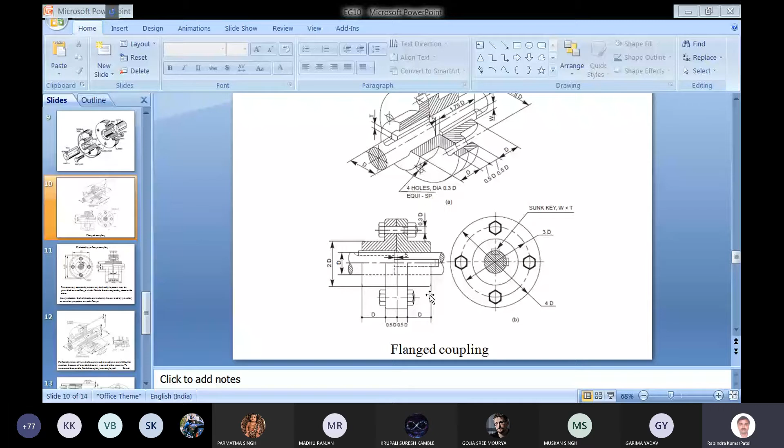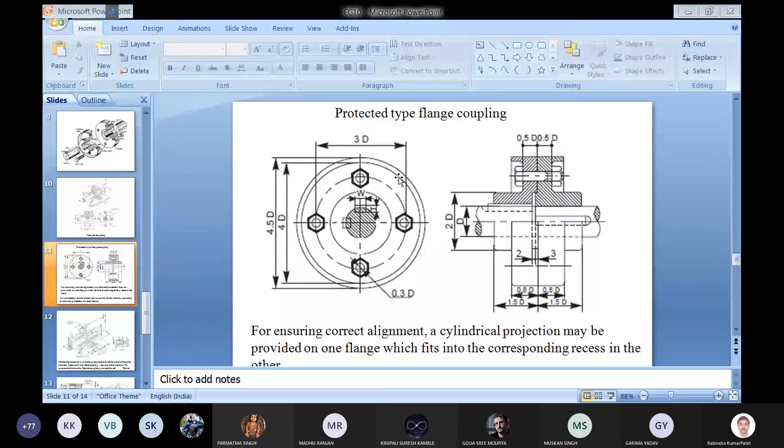Now we can see the same coupling which we have explained, the protected type flange coupling, where the upper half in section of that same coupling has been shown. Only protection has been made, and the rest of the things are the same for this coupling also. Here the side view has been shown. Side view is also the same, only one extra circle will be coming here, the second largest circle. So that is corresponding to the protection. Projection.

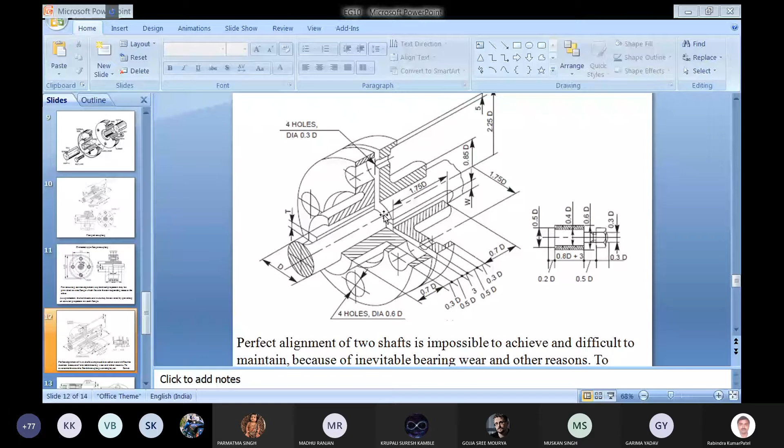So there's no difference in this. Only difference is that here no projection has been given, and at the same time here a hole with bigger size is there, of such size which can accommodate these washers. Leather washers are there, so if a little bit of misalignment is there in the shaft, they will be compressed in one or other way. So that's why this type of bolt has been used in this case.

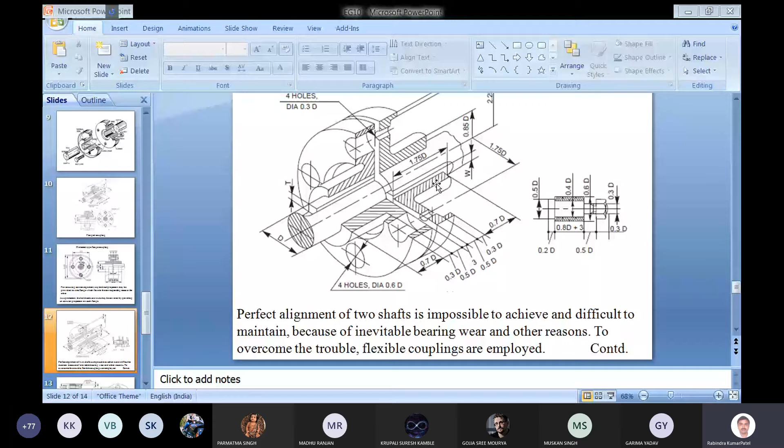So here in the section you can see the front view upper half in section has been shown. Washers are shown here, 3 washers, and different directions for hatching have been shown for each washer, because the different washers may have different materials. Even if they have the same material, we can show the hatching in different directions, because they are different parts. And the side view you can see like this, which is the left side view.

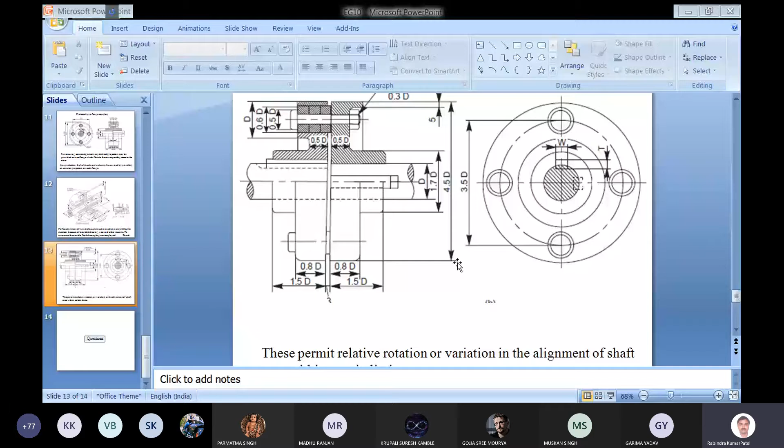So with this, this lecture is over. If you have any problem related to any part like cotter joint, knuckle joint, and coupling, you can ask.

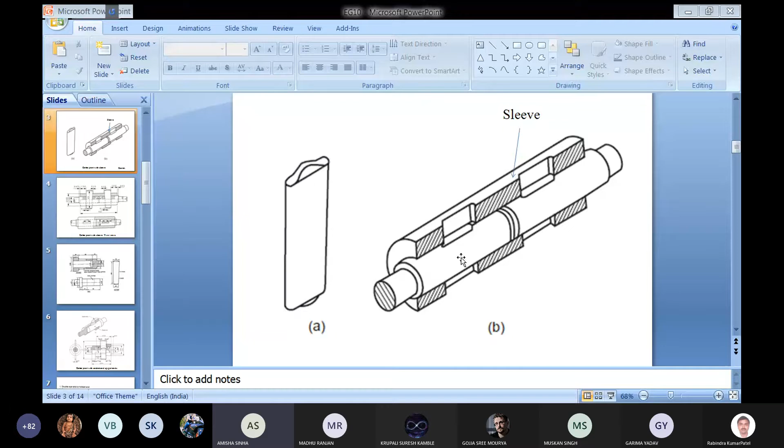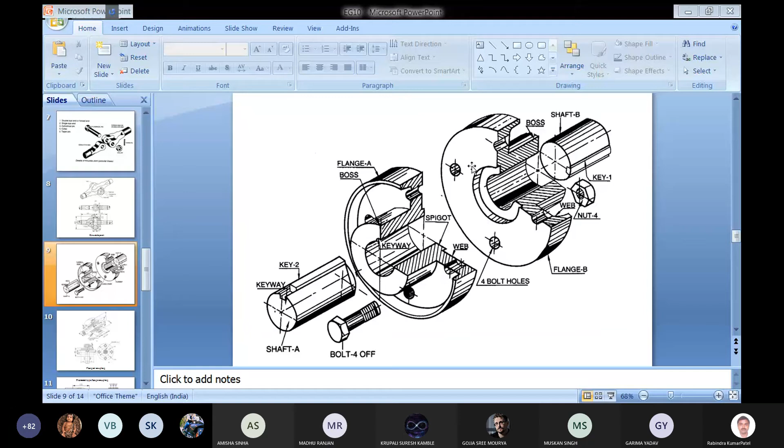Could you explain this protected flange coupling again? Okay. So in the protected type flange coupling, we have two flanges like this. In one flange, a protection or projection has been made. Similarly, we have a projection on the other side of this flange. Apart from the projection, we have a boss or hub here. This is the boss or hub.

In the hub, there is a rectangular slot throughout the length of this flange. Similarly, we have a rectangular slot for the second flange. We have a shaft here, another shaft here. In the shaft there is a keyway, which is also a rectangular slot. When we assemble this shaft with the first flange and align the keyway of the shaft with the keyway of the first flange, we will get a space between the shaft and the hub of the first flange, and then we can insert a key which can fill the gap.

So we have locked the shaft with respect to rotation of the flange A. Similarly, we can lock the shaft B with respect to rotation of the flange B.

In the same way, we insert the shaft here, and after that we can rotate the shaft in such a way that the slot or keyway in the shaft as well as the keyway in the hub are aligned, and after that we will insert the key. When we insert the key, some part of the key will be in the shaft, and some part of the key will be in the hub of the flange. So the flange or shaft cannot rotate independently; they have to rotate together, because they are locked with the key.

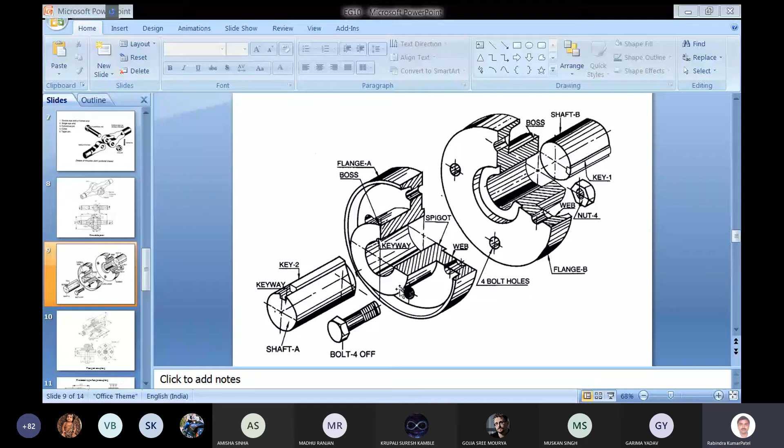After that, we can rotate one of the flanges so that all the holes of one flange get aligned with all the holes of the other flange. After aligning the holes, we can put the bolts, 4 bolts in this particular case, with nuts. In this way, the flange coupling has coupled the two shafts. So if we rotate one shaft, the other shaft will rotate with the help of the flange coupling. Sir, regarding, yes.

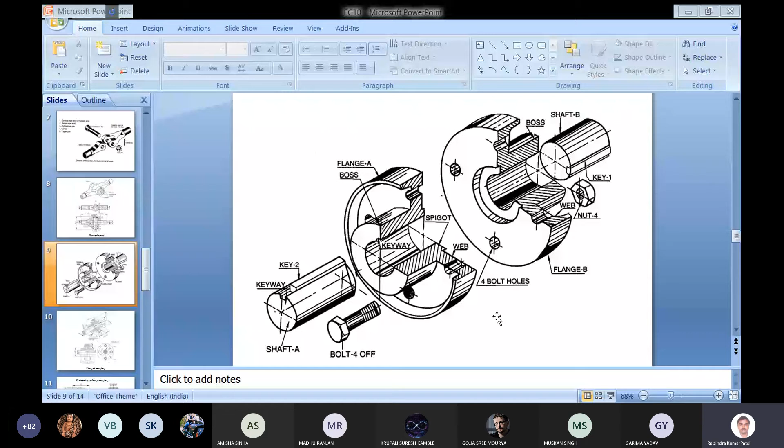But in the unprotected one, it is not necessary that if we rotate shaft A, then shaft B will also rotate with it? No, both the shafts will rotate together. Like here also, you can see there is one key here, another key is here. So key, shaft and flanges are locked together on this side also, and after that we will put the nut and bolt here, as has been shown. When the two flanges are joined with the help of nut and bolt, both shafts will rotate together. If we rotate one shaft, the other shaft will rotate because the flanges are joined together.

Sir, so then what is the main difference between the protected and the unprotected one? The only thing is that there is no projection on this flange. Here also no projection is provided. So in this case, during the rotation of the shafts, due to vibration the nut can be loosened, and when it is loosened, it can fly very far with a very high speed and hit some personnel working around the coupling.

So in the protected type, we put some protection here on this side. When the projections are there, they will not allow the nut to go away. They will stop the nut, and the nut will fall on the ground in the vicinity of the flange coupling. So this is the advantage and difference between the two. In the unprotected case, it can go away, and in the protected type, the nut will fall at the location where it is used. Okay, sir. Thank you. Understood.

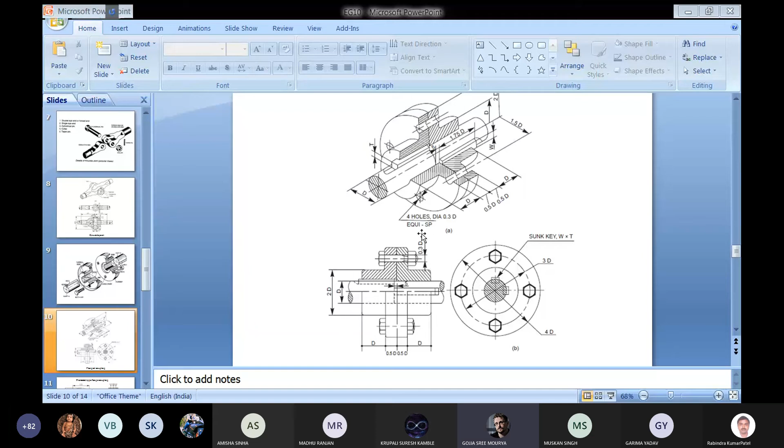Sir, can you show slide 9? Yes. Sir, on shaft A there is a keyway, no sir? Yes, there is a keyway on the shaft, and the keyway is there on the hub of the flange also. Sir, for key 1, is there any slot on shaft B? Yes, there is a slot in shaft B, in which the key has been kept. The slot has not been marked, but the keyway is here also. Only some part of the key is shown here, and if we extend the shaft, we can see the slot.

Sir, you told that when the spigot is inserted into the recess, then we align the bolt holes. But after putting the spigot into the recess, we can't turn the flange, no sir? So how will we align? No, we can rotate. Some clearance will be there between the spigot and the recess, so we can easily rotate.

Sir, among all these, which coupling will be the strongest? Flange coupling is used at locations where the shafts are in alignment, and if there is a little misalignment between shafts, then we can use the flexible coupling. Sir, which is better among all? It depends on the situation. If we compare the protected type with the plain flange coupling, the protected type will be the better one. Okay, sir. Thank you, sir.